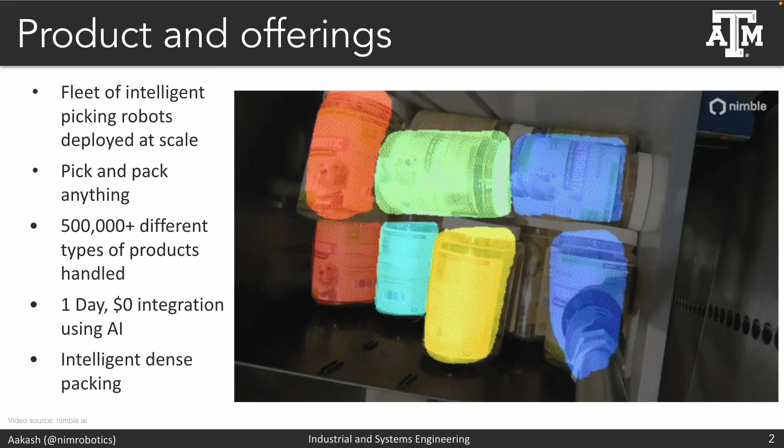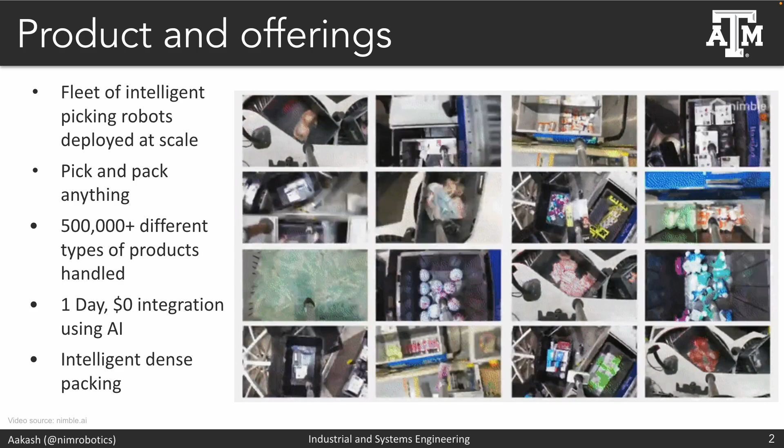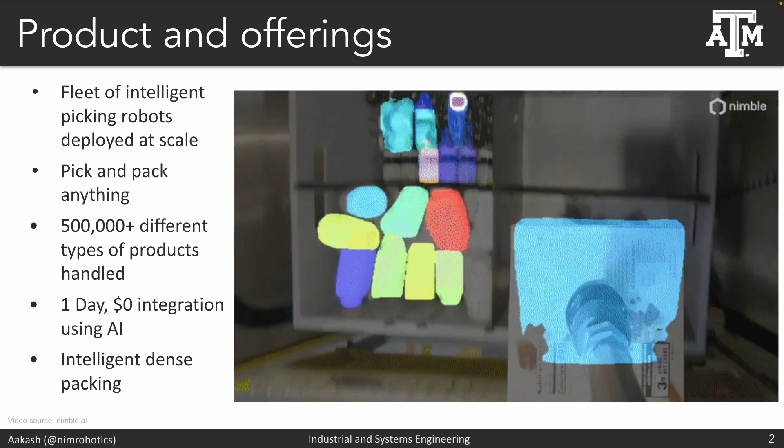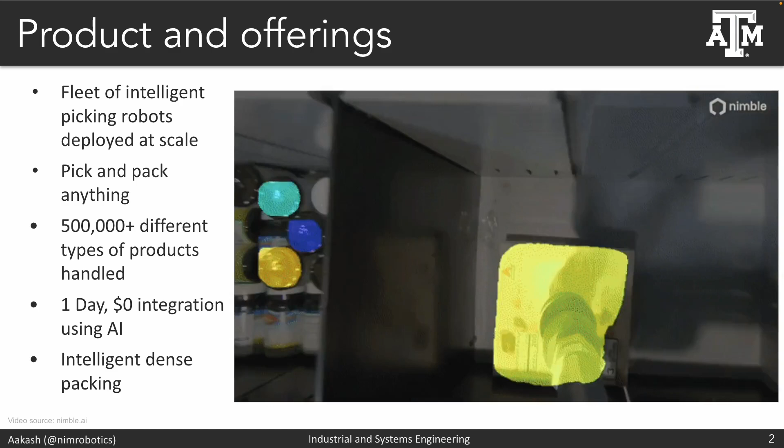Nimble Robotics is a startup focused on developing intelligent robotics solutions for the logistics industry. It offers a fleet of intelligent robots to replace expensive and inefficient human workforce. It claims its robots can pick and pack anything including clothes, shoes, and other small items. So far it has handled more than 500,000 different types of products. The company offers single-day integration with zero initial setup costs, and its robots can perform intelligent dense packing of items.

Nimble Robotics was founded in 2017 by Simon Kalouche while he was enrolled in a PhD program at Stanford. He eventually dropped out of the program to focus on the startup. The company has raised a total of $50 million in funding in Series A.

Simon holds a master's degree from Carnegie Mellon University with a great background in robotics and machine learning. He successfully roped in his PhD advisors, Sebastian Thrun and Dr. Fei-Fei Li. Sebastian has been associated with many companies and startups and brings great expertise in robotics and AI. Dr. Fei-Fei Li is the director of the AI lab at Stanford with expertise in computer vision and deep learning. The core team consists of 17 members with backgrounds in computer vision, robotics, hardware, software, and operations.

Other than the board directors, only one member has a PhD degree. However, the majority has a master's degree with substantial industrial and research experience. At present, Nimble has a total headcount of 122.

The patent filed by Nimble in 2020 provides some insights on how their system works. As per the patent, manually picking and placing each product in the bin is labor-intensive, expensive, and inefficient. The reason companies have not adopted robots in fulfillment is due to high initial setup costs, as setting up a new system typically requires changing the existing infrastructure and warehouse codebase. However, Nimble robots are designed to assume the role of the human operator and use the same system typically used by manual operators, meaning the robot needs to use existing interfaces and instructions to carry out the task.

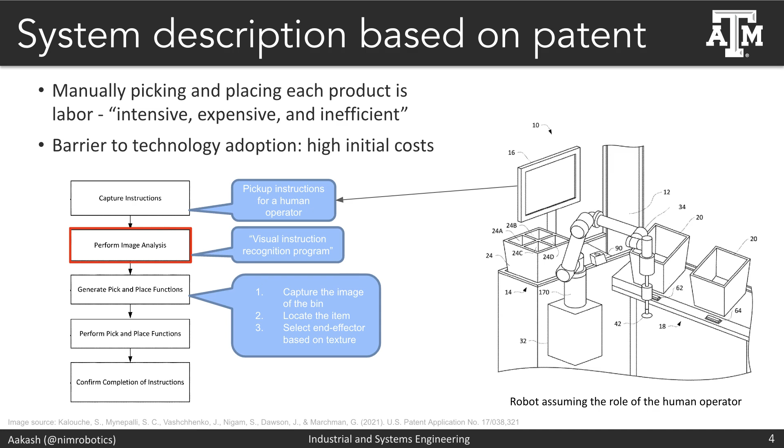First, the robot captures the image of the display and parses out the instructions using a visual instruction recognition program. Once the instructions are parsed, the robot executes the pick and place functions, which need to locate the object in the bin and assess its texture to select the appropriate end effector before picking up the item. Once the item is identified, the robot performs the operation and feeds the feedback to the system using a push button. Originally designed for humans, artificial intelligence has been used at various stages in this product.

Although no associated publications or patents were found, the website hints that the product uniquely fuses robotics, computer vision, deep imitation, self-supervised, and reinforcement learning. Computer vision and deep learning methods are used for three aspects: first, to get task instructions from captured images, and then to segment and identify items in the bin. The identified object then needs a classifier to select the appropriate end effector tooling suited to its texture. Once the item is located and tooling is selected, the robot performs robot motion planning to execute the task. Further, the robot needs to optimize the packing of items to save space.

This video focuses on the object identification, segmentation, and tool selection part. Now I describe the speculated AI architecture for the pick and place task. Once the robot gets the instructions, it captures an image of the bin. The image is then fed into a deep learning model to identify and segment the items in the bin, potentially using algorithms such as You Only Look Once and R-CNN.

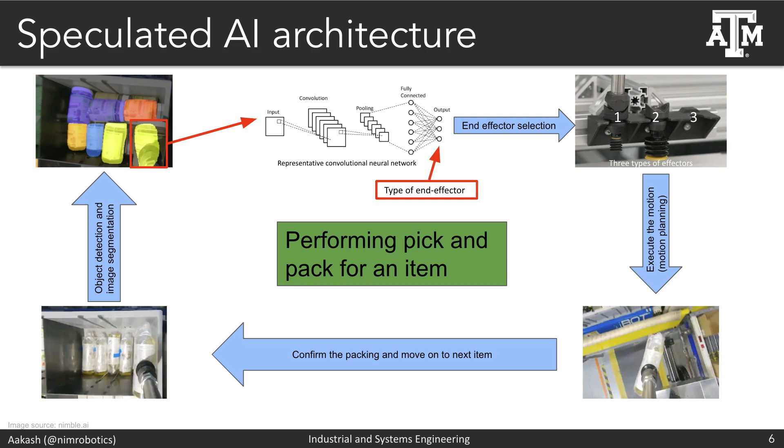The segmented items are then fed into a deep learning classifier, with the input to the convolutional neural network being the image of the single entity. The network performs multi-class classification to choose one of three end effectors appropriate for the object's texture. Once the tooling is selected, the robot performs robot motion planning to execute the given task, then confirms the packing and continues with the next task.

The computer vision and deep learning models are most likely based on large pre-trained models on large image datasets. These models can then be fine-tuned to this specific task using transfer learning with a small dataset. Further, the data generated by the robot can be used to augment the data and improve the models. For motion planning, the robot can use model-based reinforcement learning on simulated data, then use the learned model to plan motion in the real world.

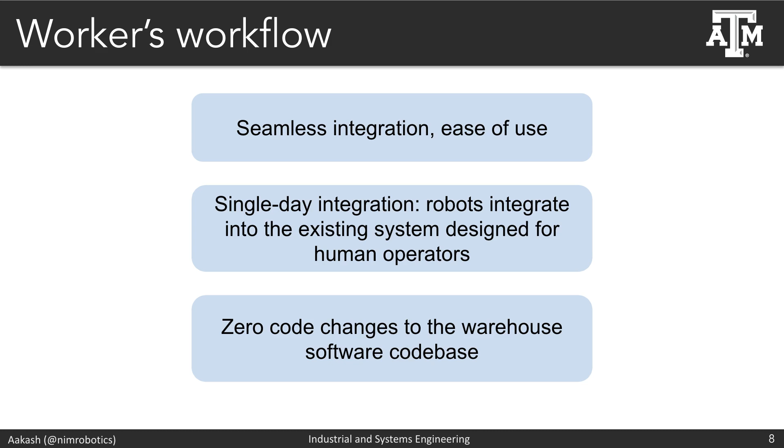Nimble claims 99.9% production accuracy. Metrics can include the success rate and completion time. Nimble provides seamless single-day integration with zero code changes to existing software. One of the company's goals is to replace expensive labor; however, it does not hold any accountability towards the workers. It should provide training to workers to prepare them for this job shift. Further, the models are not fully interpretable.

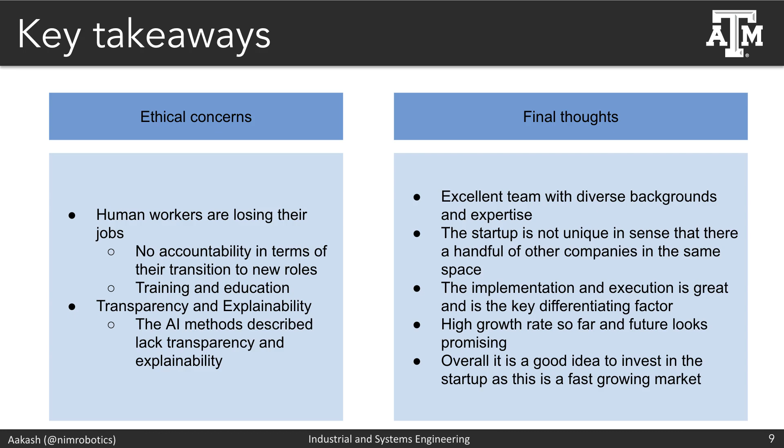Overall, the company has an excellent team of experts. Implementation and execution are two main factors that differentiate the company from others. The startup has made good progress, and I recommend investing in it. Thank you for watching.